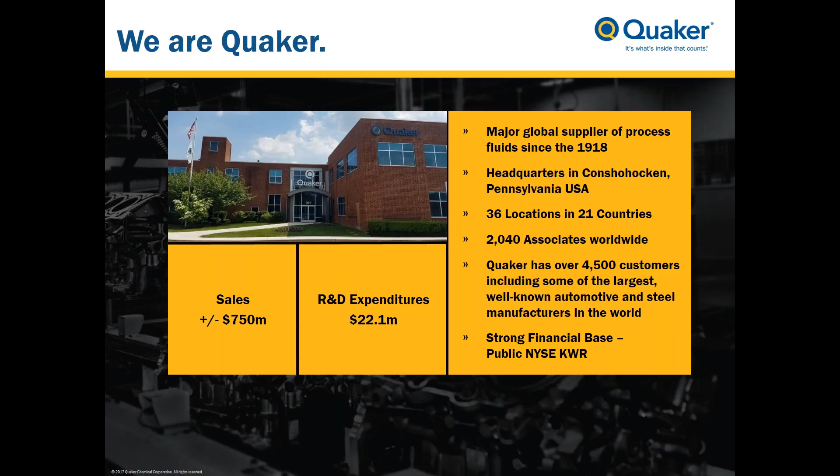Quaker has approximately 4,500 global customers, including some of the world's largest manufacturers in the automotive and steel industries, with yearly sales of approximately $750 million. Quaker is a public company. It is traded on the New York Stock Exchange and is listed under the ticker symbol of KWR.

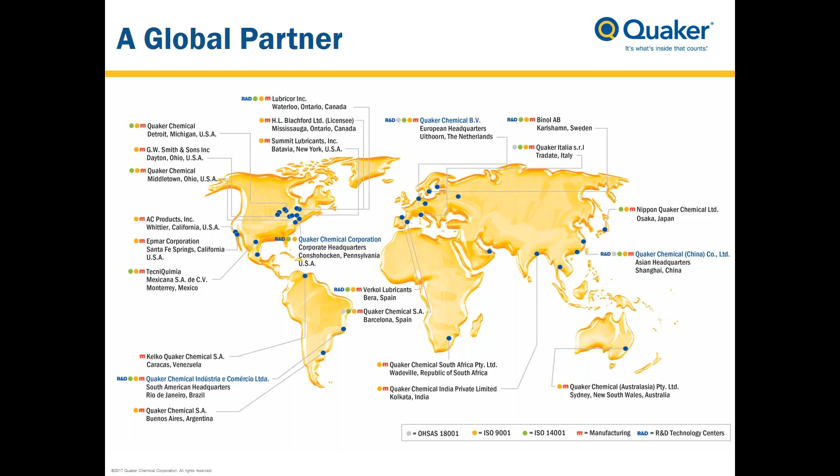This next slide shows the global presence that Quaker currently maintains. We have facilities in 27 countries, in 36 locations in 21 countries. And we have R&D facilities located around the globe. Our four main technical centers, however, are located in Conshohocken, Pennsylvania in the USA, right outside Amsterdam in the Netherlands, in Shanghai, China, and in Rio de Janeiro in Brazil.

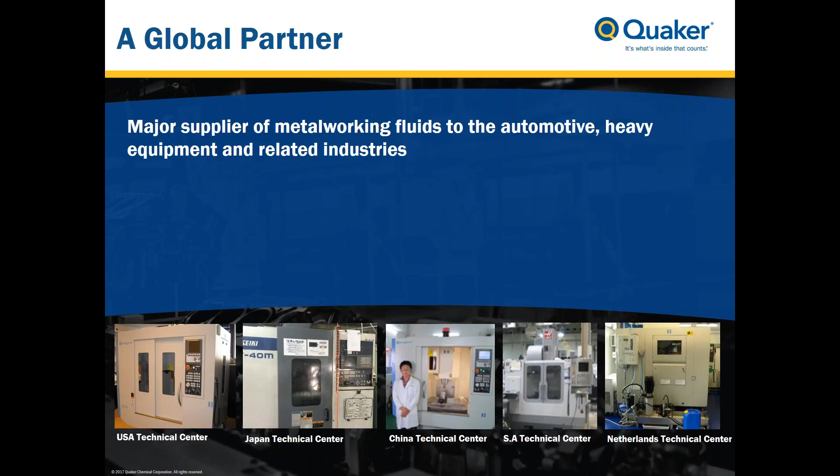Within the metalworking industry, Quaker is a major supplier of metalworking fluids to the automotive, heavy equipment, and related industries. To support our activities in metalworking, each of our global technical centers houses fully instrumented machining centers. Along the bottom of the slide, you can see some photographs of the machine tools that we utilize and have housed in our different technical centers.

These machining centers that we operate and maintain are used for a lot of different functions to support the industry. This is from customer projects to customer service to supporting internal research and development, as well as conducting more applied and fundamental research. A significant amount of this research committed within our facilities goes into supporting the emerging trends in the automotive engine manufacturing industry.

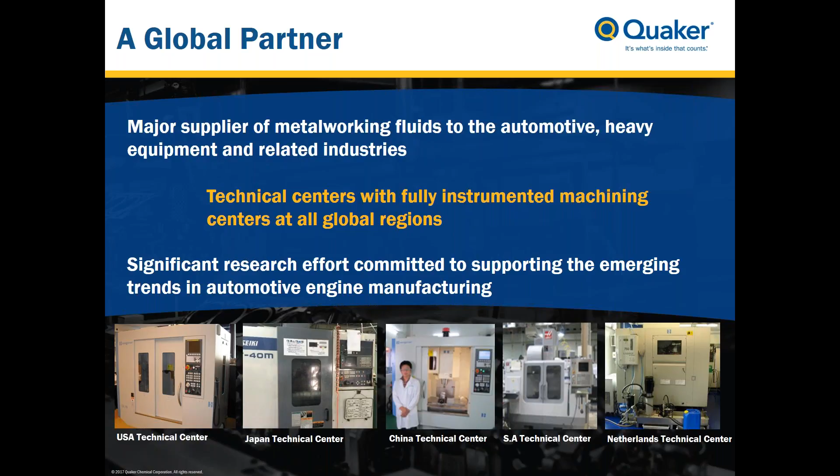So let's first talk a little bit about what these emerging trends are. Two of the major objectives right now in the automotive industry, which is driving a lot of the new development and trends in manufacturing, are shown here on the next slide. One is the drive towards increased fuel efficiency, and the second is the drive towards reduced emissions.

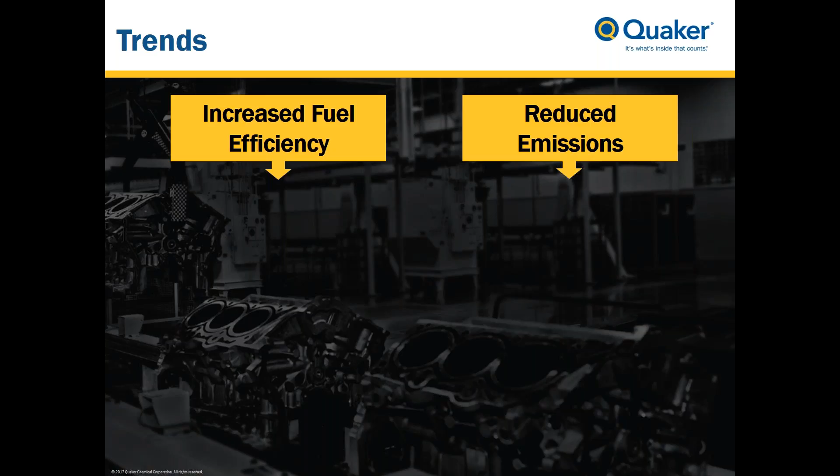With these two objectives, a lot of the new developments in materials, processes, and manufacturing procedures are resulting. Two of these results from these two industry objectives: one is the lightweighting of the engine and the lightweighting of associated components to the engine. And then secondly, related to reduced emissions and also related to lightweighting, is the drive towards use of stronger materials, again, for engines, engine parts, and associated components.

With the lightweighting being done to the engine and all the accessory components, and the use of stronger materials, has driven the design of new highly engineered materials and material combinations. Now, there has been much progress made in this regard that has achieved good advances in fuel efficiency, good advances in reduced emissions. So the steps being taken, the lightweighting, the use of stronger, harder materials for many very critical engine components, is achieving very much of the target needed.

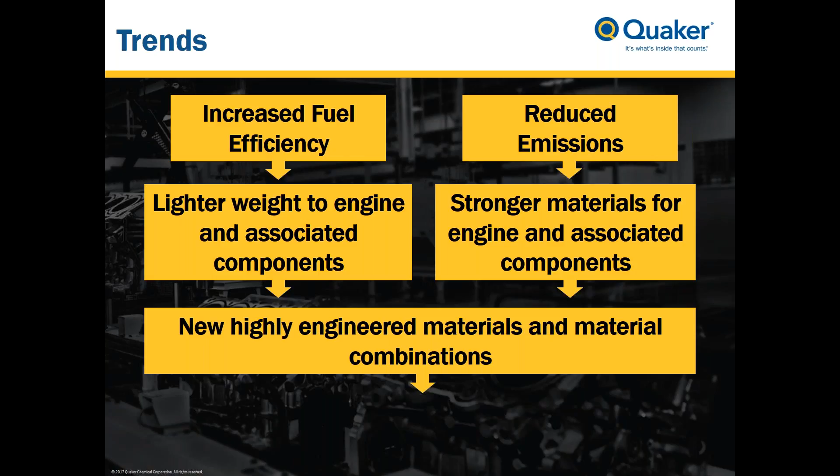However, it also presents some very increased and unique challenges with regard to fabrication of the part. And this is where Quaker and a number of other companies are spending a considerable amount of time looking at these machining challenges.

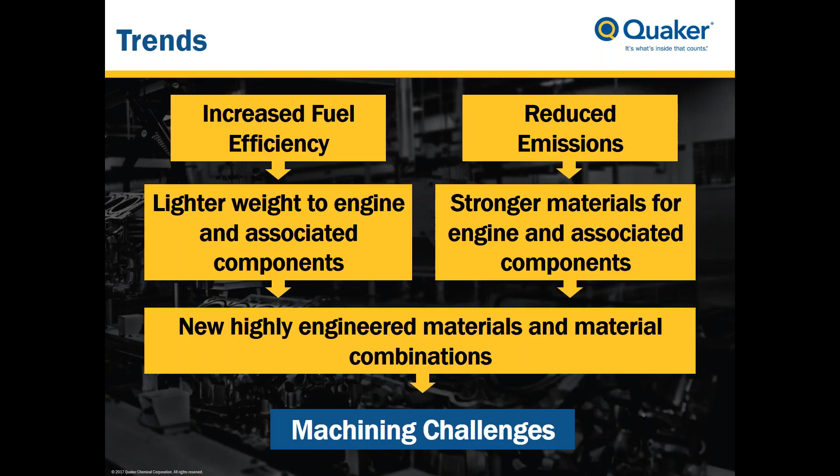The first one is the trend toward direct fuel injection. It has a significant positive impact on engine efficiency and emissions. However, it presents some very clear and distinct machinability challenges, particularly in the injector bores and some of the unique configurations of machining that are needed.

A second one is the increasing use of hydroformed hollow camshafts. Again, the main target is for lightweighting, which it effectively contributes to. However, it presents some unique machining challenges for these camshafts.

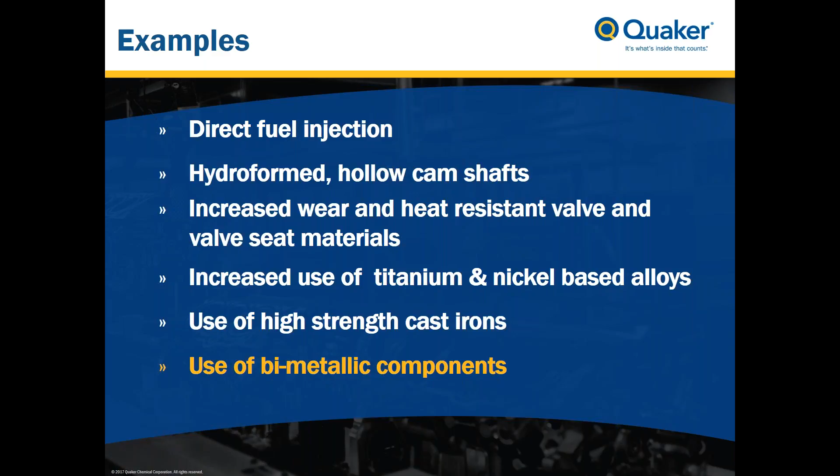What I'd like to do now is give a very quick definition of bimetal machining. What we mean when we talk about bimetal machining is a condition or process where you're simultaneously machining two dissimilar metals. Usually one of these metals is utilized because it serves to provide the lightweighting function to the part, and the second metal is usually incorporated because it serves to fill a role where you need high strength, high thermal resistance, and quite often higher wear resistance.

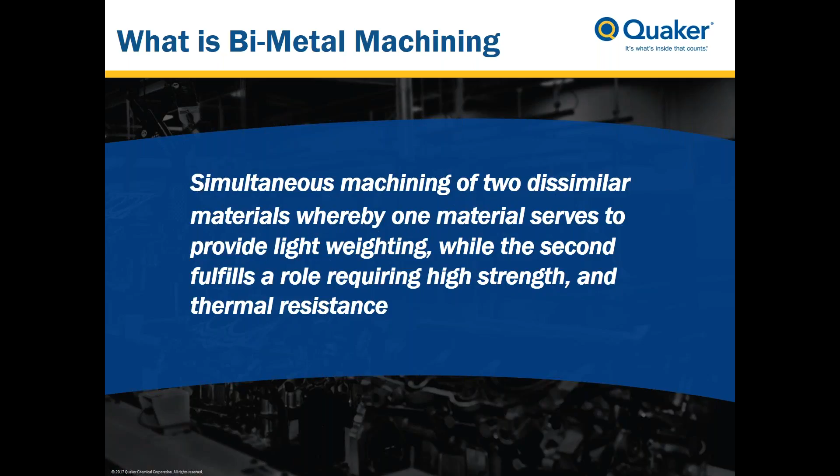In regard to engine production, there are two very significant challenges we face in our work. There are two examples of bimetal machining that we've done quite a bit of study on within the engine production area.

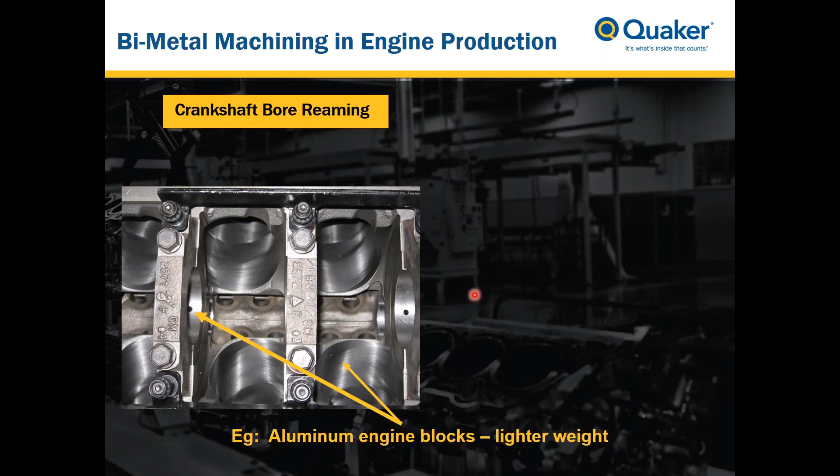The first one is in the crank bore finishing, or crank bore reaming, operation. What's shown in this picture is the crank bore as it's attached to the engine block. Here you can see the aluminum engine block, which provides lighter weight. If you look at the picture, you can see the crank bore right here, a second one here, a third one here. The picture is cut off, so there may be a fourth or even additional ones after that. You can see three of the actual bores here, and the aluminum block makes up the bottom half of the crank bore.

The top half is the main bearing cap, and this is typically a ferrous metal—either a cast iron or, more commonly used today, a sintered powder ferrous metal. This part and its material provide the needed strength and rigidity for the high stresses that occur as the crankshaft is in operation.

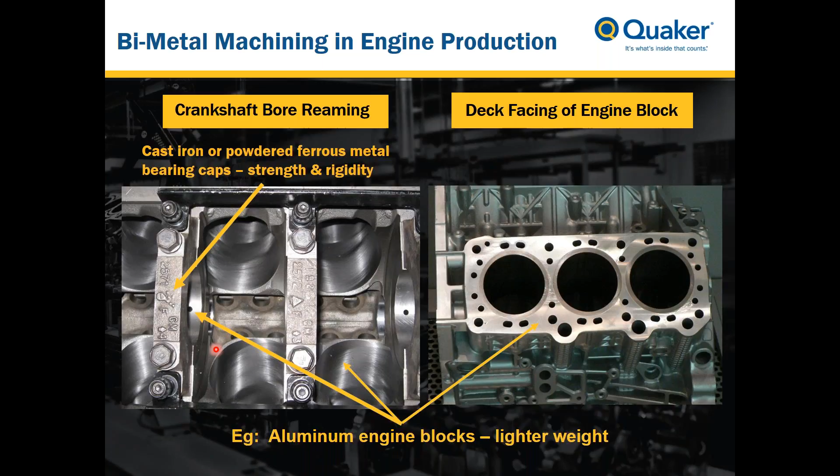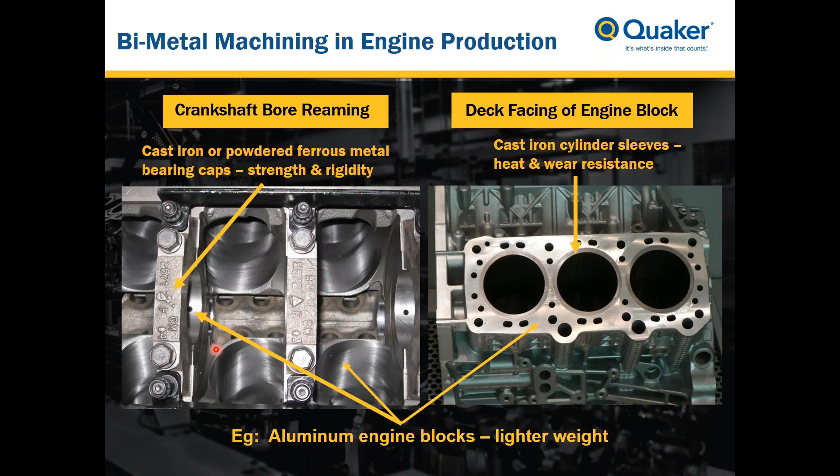The second example we deal with quite often is the deck facing of the engine block. Here's a picture of the deck face. Again, the lightweighting of the engine is obtained through the use of a cast aluminum alloy, shown here, while high wear resistance and thermal resistance in the cylinder itself is achieved through the use of a cast iron cylinder sleeve. So when they face mill the deck face of the engine, they're going to face mill the aluminum and simultaneously face mill the ferrous component, which is the cast iron sleeve. Both of these examples present increased challenges and increased difficulty in machinability relative to machining the aluminum by itself, or even the cast iron by itself.

So I guess the next question that might be useful to discuss is why are bimetal parts difficult to machine? There are two primary factors responsible. One is the difficulty arises from the differences in the mechanical and thermal properties between the two metals used, and this is a significant factor, and we'll get more into this in a couple slides.

The second factor, related to the first in part, is that the machining conditions necessary to machine a bimetal part are a compromise between those that would be optimum for machining either of them. For example, an aluminum engine block and a cast iron cylinder sleeve - if you were going to machine aluminum by itself, you would use significantly different machining conditions, tooling, maybe tool geometry, maybe even the metalworking fluid, than if you were going to machine cast iron. So there's usually a compromise met on the machining conditions, which would then decrease the productivity and the efficiency of the operation.

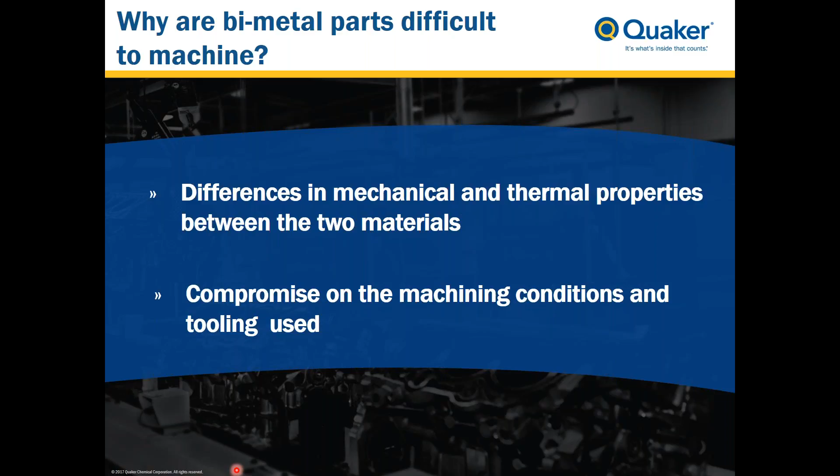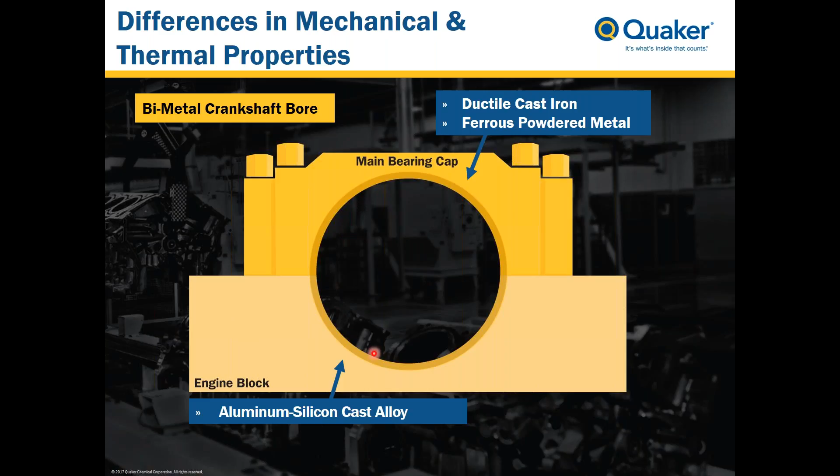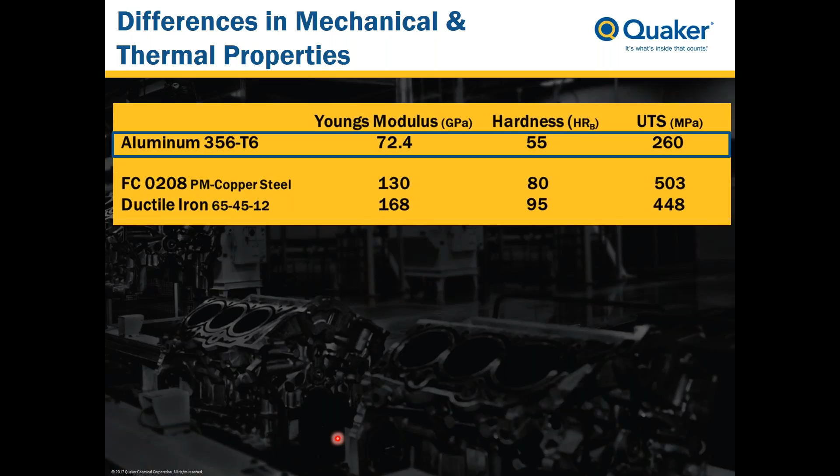Probably what's more important, though, is the elastic properties of the materials. You can see the Young's modulus, often referred to as the elastic modulus, gives a measure of how easy it is to elastically deform under either a compressive or a tensile stress. What you can see is that aluminum will start to deflect or elastically deform at a much lower pressure than will either of the two ferrous components. This presents a situation where, under stress - whether compressive or tensile during machining - the aluminum could start to deform much quicker and at a much greater rate than the mating component, either the powdered metal or the ductile iron. So all three of these mechanical properties present some unique challenges because of the differences between the aluminum and the ferrous component.

If we look at the thermal properties, there are some differences equal in concern and magnitude to the results they can bring about. Looking at the aluminum and the ductile iron, the coefficient of thermal expansion tells you what dimensional change occurs with increasing temperature of each of these materials.

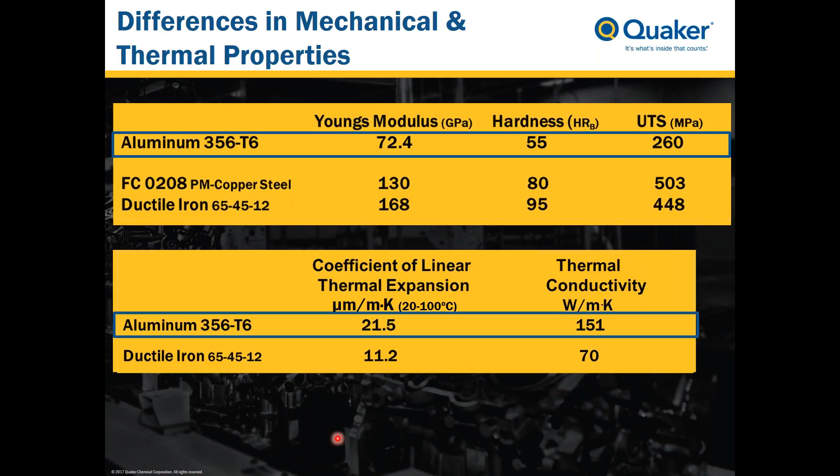What you can see is that as the aluminum heats up, it's going to expand considerably more than the ductile iron will. So as you're machining a bore that contains both the ductile iron and the aluminum, and you're generating heat during cutting, during deformation, during friction, the aluminum will start to expand at a much greater rate than the corresponding ferrous component. This presents unevenness in the bore being machined, different flexure properties, some deflection that can occur, and ultimately some very real machining challenges.

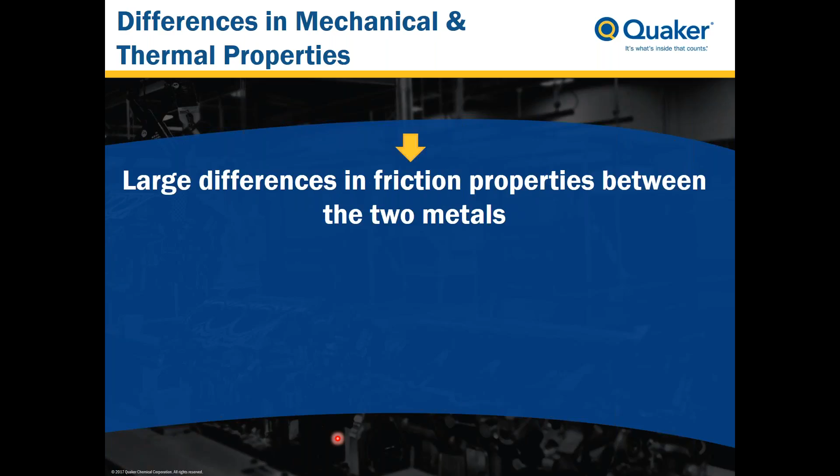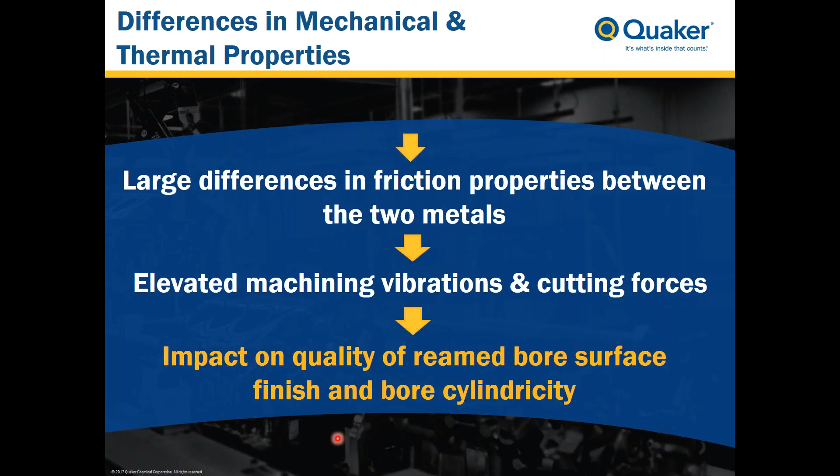To summarize these differences in mechanical and thermal properties: the large differences in friction properties between the two metals, arising from their mechanical and thermal differences, can lead to very elevated machining vibrations and cutting forces. Ultimately this has a negative impact on the real critical specifications of the crank bore during machining - that is, the surface finish and the cylindricity that's produced. We'll talk more about that later in the webinar.

The second factor that contributes to the difficulty in machining, as I mentioned, is that typically there's a compromise in the tooling used and the machining conditions. I'd like to present at least two examples of this, and one is the tooling.

Typically in machining aluminum, polycrystalline diamond or some form of synthetic diamond cutting tools is best suited. You're going to get your best finish, and you'll be able to run at considerably higher cutting speeds and feed rates using PCD cutting tools. Unfortunately, they're not compatible with ferrous materials because of degradation of the tool material - the diamond solvates up into the ferrous component at higher temperatures.

Typically, what you need to do is run with another material, and quite often in bimetal operations, carbide tooling is used. Carbides are okay for aluminum and usable, but there is higher wear that results from the high silicon in the aluminum on the carbide, and it's okay for ferrous as well. So you can see that while there are optimum tool materials for each of the metals in a bimetal operation, you usually settle on a compromise.

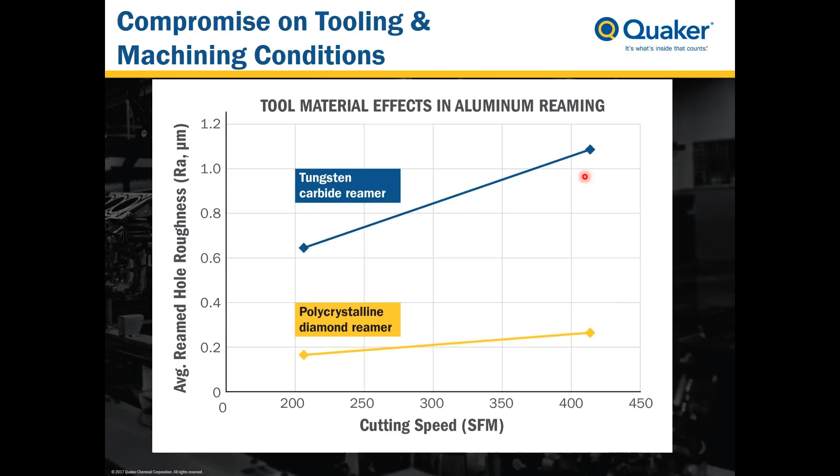A second example is cutting speeds. Quite often with aluminum, you're able to run at higher cutting speeds, and with iron you need to go at a lower cutting speed. So again, you're typically trying to reach a middle value that can sustain acceptable quality for both the aluminum and the iron.

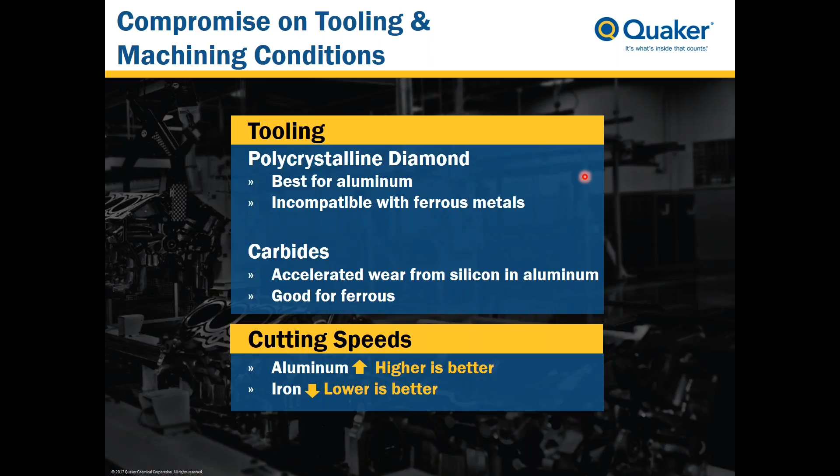So now what I'd like to talk a little bit about is our studies in crank bore reaming. As a company committed to supporting the engine manufacturing industry, and to be able to contribute support, suggestions, and offer very high quality fluids for use in these processes, it is necessary to study this process in our laboratories under controlled machining conditions.

So we developed an in-house laboratory machining test with two criteria in mind. One, whatever this test is needs to effectively simulate the actual machining process. And two, it really needs to replicate machining difficulties experienced during the reaming of bimetal parts, particularly in simulating crank bore reaming.

So what we did is develop a workpiece that simulates the actual crankshaft bore, shown in the picture on this slide. We fabricated it out of two materials: aluminum 356-T6, which simulates the engine block, for the lower half of the bore, and the top half fabricated out of a sintered powder metal FC0208. This material is a very common powdered metal used for main bearing caps in automotive production.

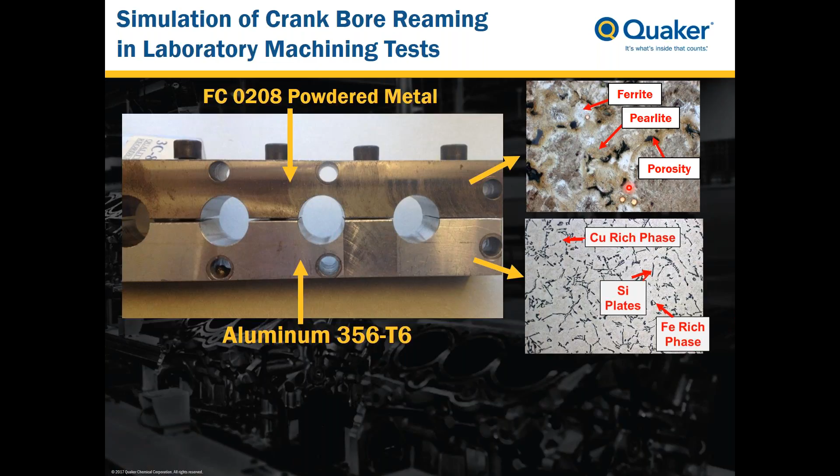These areas of porosity also present some unique challenges in machining. The bottom piece is a high silicon containing cast aluminum, and the microstructural features of this material are shown, again very characteristic. You can see the copper-rich intermetallics, the silicon plates characteristic of these high silicon containing alloys, as well as the iron-rich intermetallic pieces.

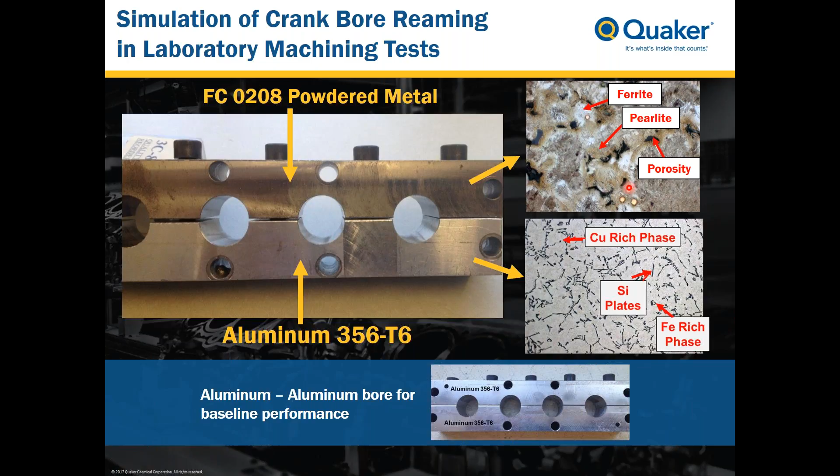To be able to demonstrate the difficulty in studying bimetal machining, we also wanted to study and test the machinability of a part that's not bimetallic. So for this, we fabricated a part with a bottom half of aluminum and a top part that was also aluminum, as you can see in this picture. We used aluminum 356 for the bottom half of the bore, and the same metal, aluminum 356, for the top part of the crank bore.

Following reaming of the holes, the critical parameters we measure are twofold: one, we want to look at the reamed hole cylindricity, and two, we want to measure the surface roughness of the reamed hole. These are probably the two most critical parameters measured in the actual crank bore reaming operation: cylindricity and surface roughness. What I'd like to do is spend a couple slides talking about why these two parameters are important, and why they are measured in industry, and why we measured them in our study.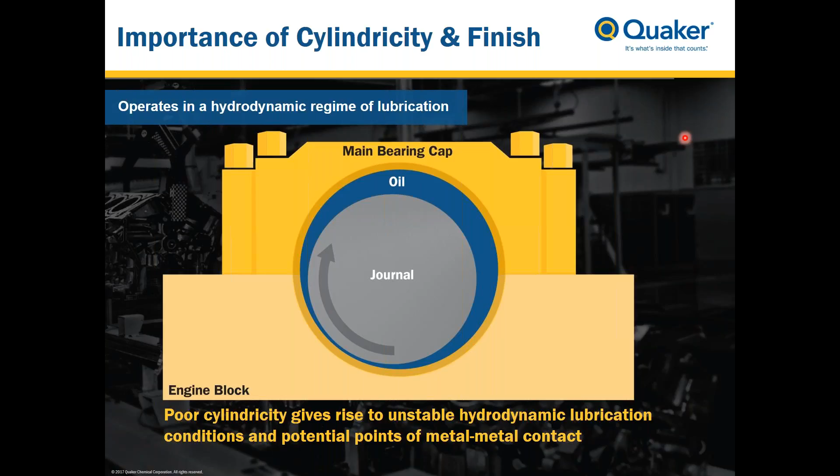This thin a film is needed to maintain a good separation between the journal and the journal bearings. The thinness of this film really demonstrates how critical it is to have very good tolerances on your cylindricity, because a loss of cylindricity of the actual reamed bore would subsequently result in a loss of cylindricity when the bearings are installed. This could give rise to a very unstable condition of hydrodynamic lubrication, which could lead to accelerated wear of the bearings, and probably before that, a very noisy operation of your engine.

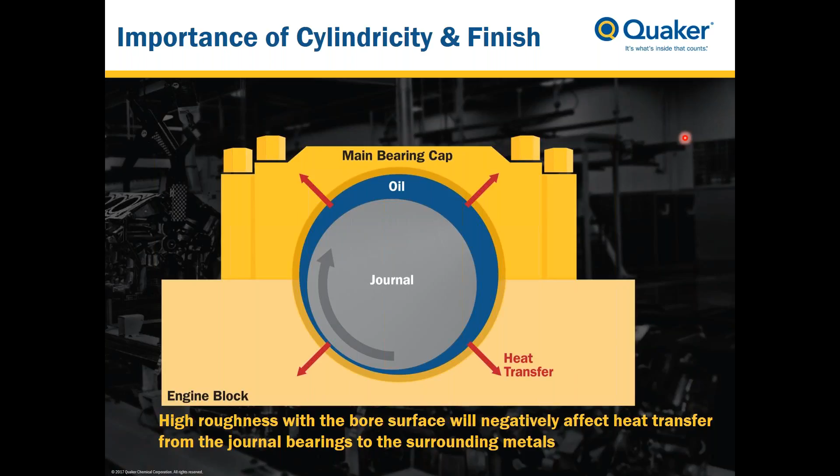If you look at the surface finish, another important property is the removal of heat from the bearings themselves. In this operation, heat is generated, whether from the sliding action, the flow of the fluid, or the stresses of the operation. Heat needs to be quickly dissipated into the surrounding materials, up into the main bearing cap as well as down into the engine block. Surface finish can be a critical property in how effective this rate of heat transfer is. If the surface roughness of the reamed bore is too high, it can have a potential negative effect on the rate of heat removal from the journal bearings into the surrounding material. So along with cylindricity, surface finish is equally critical.

What I'd like to do is show the results that we got with that same semi-synthetic machining fluid when we conducted our crank bore reaming operation under laboratory conditions.

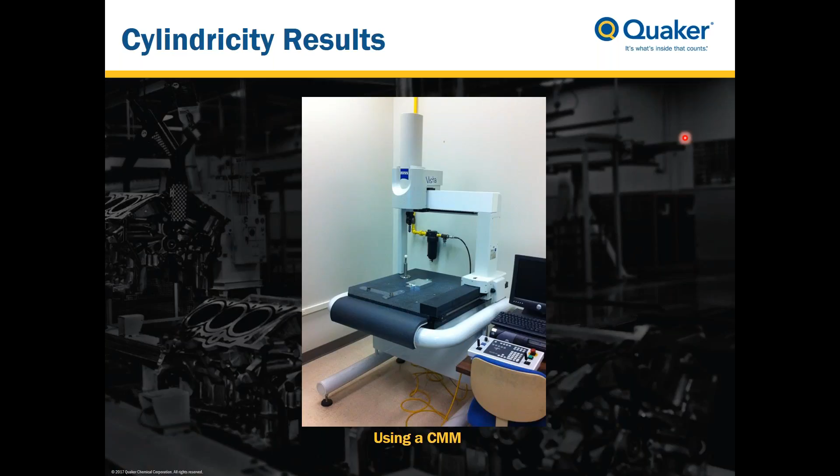First I'm going to start with cylindricity. Just to preface that, the way we measured cylindricity is using a coordinate measuring machine. It has a hard body, and it'll measure the cylindricity of the bored hole.

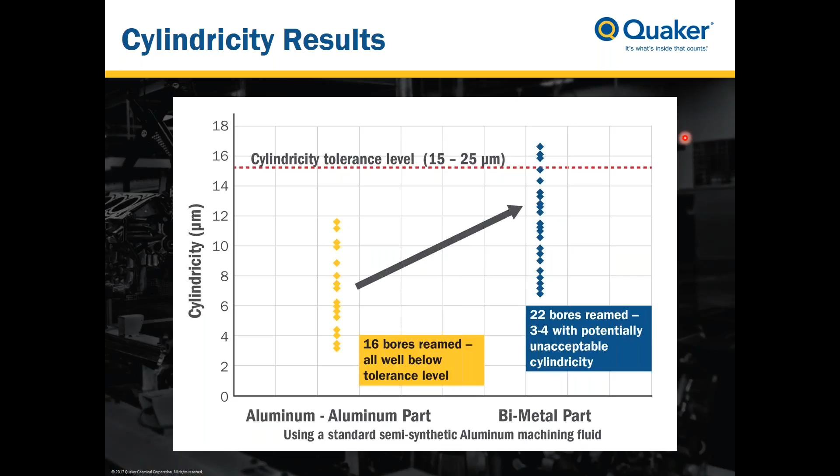If you go to the bimetal part, the aluminum powdered metal part, you can see of the 22 bores reamed, you can see two results. One is that the cylindricity is notably degraded and worse than it is for the aluminum part. Actually, if we would consider a tolerance level up around 16 or 15 microns, you could actually see that some of the bores reamed might be approaching an unacceptable level. So basically, what you see here is, as we would expect and as we saw, the reaming of the bimetal bore presents some considerable challenges and does give some poor quality.

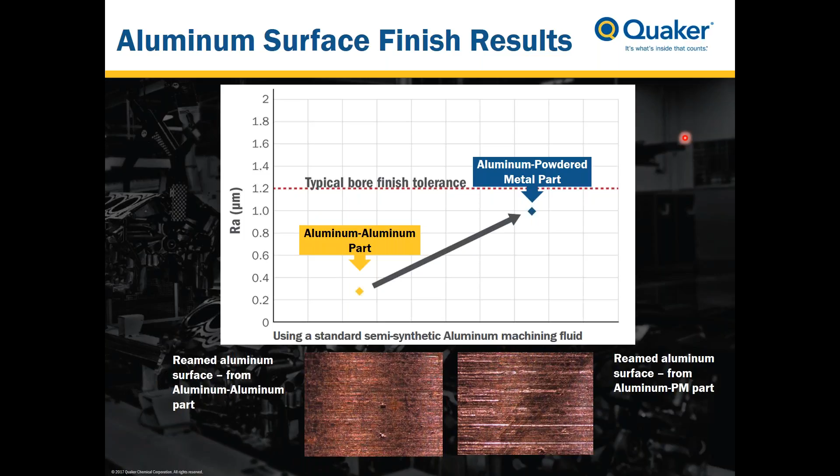So our studies in this area have led to development of fluids. Again, our objectives are to study the process, understand the challenges, the subtleties of the process, to be able to simulate and investigate different elements of the process, and also to develop new fluids that can aid in improving the productivity, the machinability, and the overall performance in these bimetal operations.

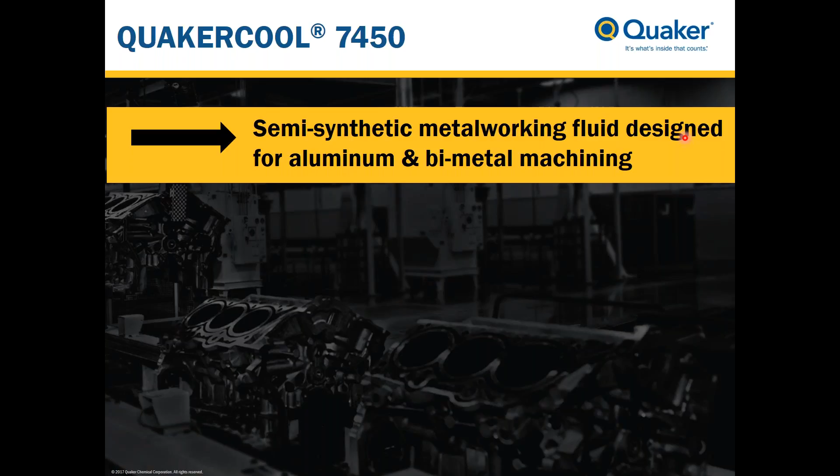QUAKERCOOL 7450 has been developed within Quaker, and it is a semi-synthetic metalworking fluid, designed for very effective machining of aluminum, but also very effective machining of bimetal parts and bimetal operations. I'll just list a little bit of the logic behind the design of this fluid.

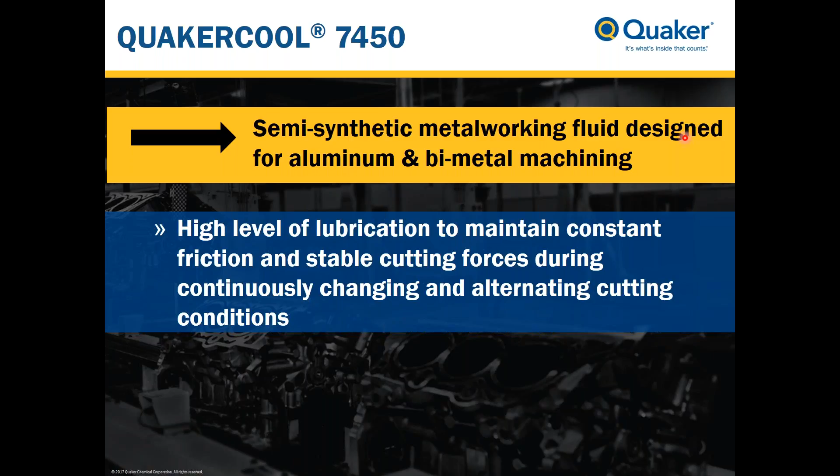One, it was designed to provide a high level of lubrication that is necessary to maintain constant friction and, more importantly, stable cutting forces that occur during the continuously changing conditions in a bimetal operation. I mentioned earlier that with the mechanical, the thermal properties, the expansivity of aluminum, the differences and so forth, you can get some very irregular or constantly changing friction and cutting forces. If you can elevate the lubrication properties of your metalworking fluid, you can minimize the impact of these changing forces and changing conditions. That's what a main element of the design of QUAKERCOOL 7450 is.

Second element is in these operations that have aluminum and a ferrous component, the cutting forces, the severity of the operation is going to be dominated by the cast iron or the powdered metal.

The cutting forces necessary in a ferrous component are always going to be more significant than aluminum. So to have a fluid that's effective for bimetal operations, it has to be a good ferrous machining fluid as well. The key here is there are many approaches to developing for ferrous machining that could potentially have a negative impact on aluminum machining performance.

This was an area Quaker put a lot of effort into, which is to engineer the fluid to maintain or provide very good ferrous machining properties without any compromise to either the roughing performance or the finishing performance of the fluid on cast aluminum alloys.

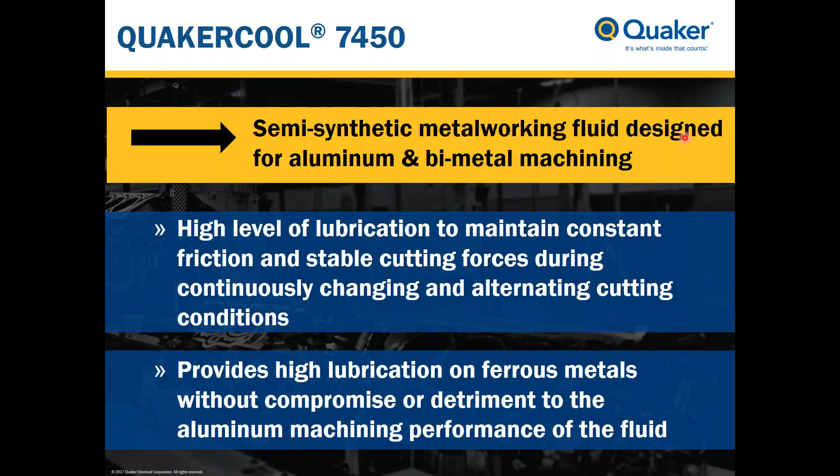What I'd like to do is show the impact this fluid can have relative to the standard semi-synthetic we used earlier, in both cylindricity and surface finish obtained.

This graph shows the cylindricity, basically the same graph as we showed earlier. Cylindricity is listed on the y-axis. The aluminum part using the standard aluminum machining fluid performs well. The bimetal part using the standard aluminum machining fluid shows degradation in the cylindricity measured.

When we use QUAKERCOOL 7450 in this operation, we see a noticeable improvement in the cylindricity obtained with the cast aluminum powdered metal part. This is significant because it gives cylindricity results that are very close and comparable to those you would get with an aluminum part.

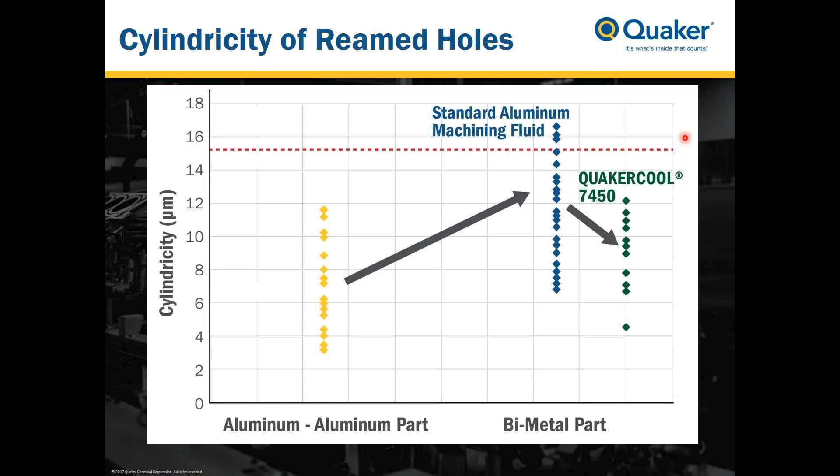Look at the surface finish, the same comparison. Here we have a graph showing the aluminum surface finish after reaming. It shows the bore finish tolerance right up at 1.2, and on the y-axis is the RA of the ream surface measured in microns, first shown for the ream finish with an aluminum part.

Here you can see that both fluids, the standard aluminum machining fluid we used and the newer developed fluid, QUAKERCOOL 7450, are both highly effective in giving good finish on the aluminum part. That wasn't surprising, and that was expected.

The interesting result was, as we showed before, that the standard fluid on the bimetal part resulted in a very noticeable degradation of the surface finish.

Up at 1, the newer developed fluid, QUAKERCOOL 7450, shows a marked improvement in the surface finish, the ream surface, obtained when reaming of the bimetal part was conducted. Granted, there was a slight degradation, a slight increase from about 0.28 up to about 0.44. Nevertheless, both of these surface finishes are very good.

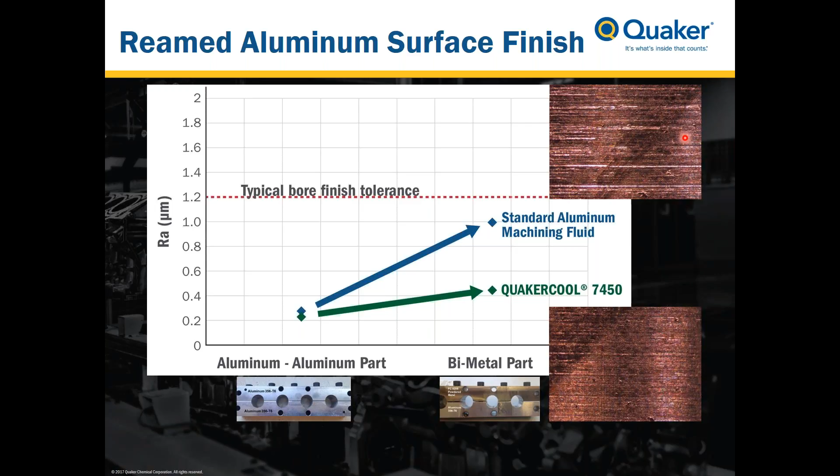Just to show the finishes obtained, earlier we saw the finish of the bimetal part using the standard fluid. We noted the general greater roughness and the scratches that can be observed. If you look at the ream finish utilizing QUAKERCOOL 7450, you can see a very good quality surface, minimal light scratching, but overall a very smooth and consistent profile on the surface.

A little bit more about QUAKERCOOL 7450 in general. It is an aluminum and bimetal machining fluid with a good bit of field experience so far. It's being globally utilized by many automotive OEMs, Tier 1 and Tier 2 manufacturers to the automotive industry. It's used in the machining of aluminum engine blocks, cylinder heads, and various associated components, such as valve seats, valve guides, steering components, as well as direct fuel injector bores.

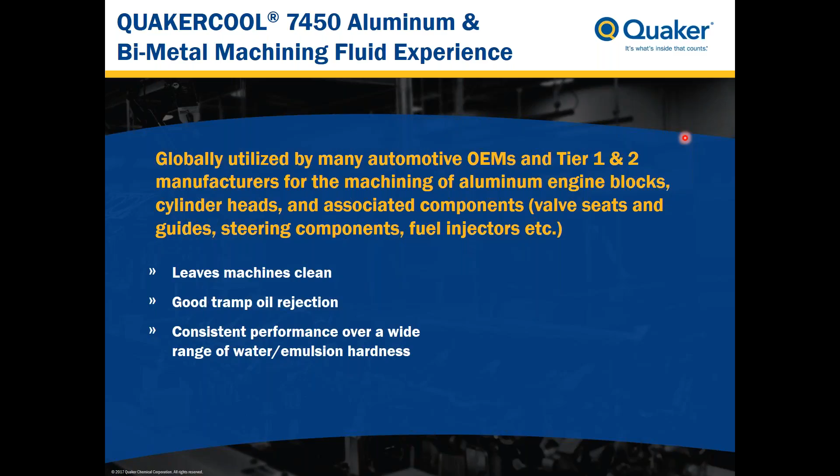Some of the behavioral features of this fluid: it's a very clean operating fluid. It is a semi-synthetic fluid, a very tight emulsion, wets out well and leaves the machine very clean during operation. It has good tramp oil rejecting properties. It's very compatible with increasing water hardness, giving very consistent performance and stability over a relatively wide range of water hardnesses in the emulsion.

Being a tighter emulsion, it's stable to some of the influences of contamination and changes. It provides a very good sump life in operation with low consumption. Regarding its microbiological properties, it has been found to be resistant to bacteria, including mycobacteria, as well as fungal resistant.

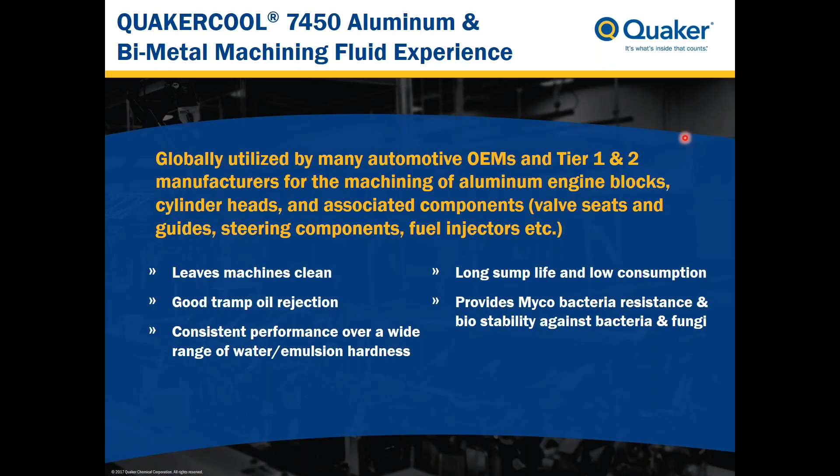So I'd like to present two conclusions to the webinar, and some of the messages to remember and take away.

One is that bimetal machining is becoming more used, more prevalent in industry. As the demands for continued lightweighting continue while keeping power to the engine, which means higher combustion pressures and higher stresses to the part, there's going to be more use of multi-metal or bimetallic parts as we go forward.

As we know from operations, and as you've seen a bit today in this webinar, bimetal machining certainly presents significant challenges with regard to the machining done, the metalworking fluid used, the tooling used, and the machining conditions used. We feel we have a good start to our understanding, and definitely there's more progress that we plan on making in this area.

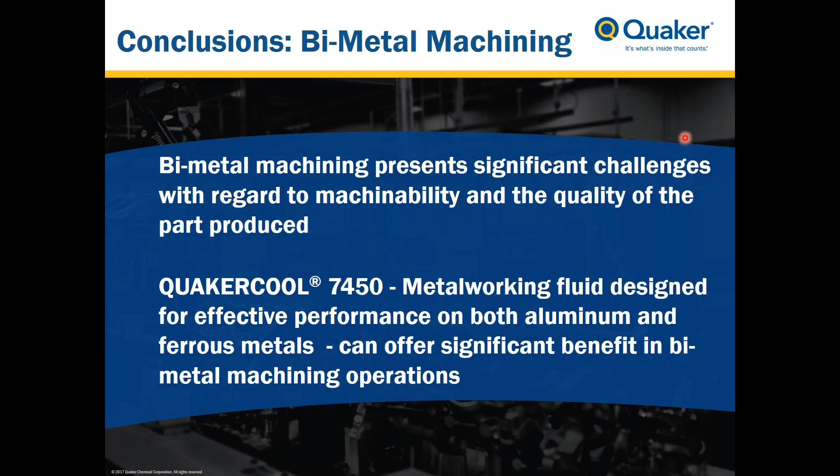Secondly is QUAKERCOOL 7450, as we just finished discussing and presenting in part. It's a new fluid designed that gives us very good effective performance in aluminum operations, and more relevant to this webinar, it gives very good performance in bimetal operations, particularly where you're coupling a cast aluminum part with a harder ferrous component.

Before I finish, I'd like to make an acknowledgement. For this study that was presented in this webinar, we collaborated with the Pennsylvania State University, specifically their departments of Industrial and Manufacturing Engineering and Material Science and Engineering. The collaboration was very effective and fruitful, and I would like to acknowledge the research team at the university for their efforts in the study that was presented.

With that, I'd like to conclude by thanking everyone again for joining this webinar. I hope you found it informative, interesting, and hopefully useful. So again, thank you very much. And with that, now we'll accept any questions you may have on any parts of the webinar presentation, or any other thoughts or questions you might have.